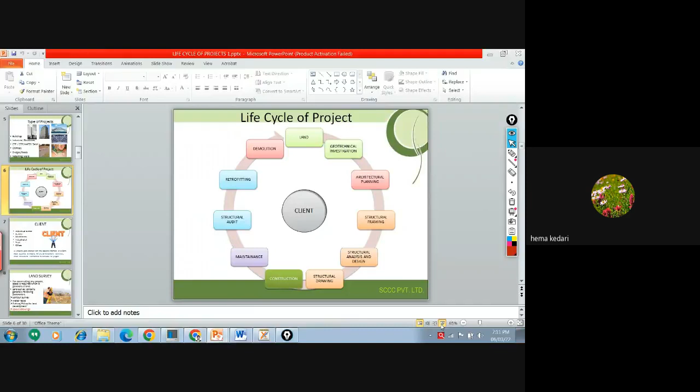Last time we started from this: client, then land survey, geotechnical survey, and architectural planning. I think all these 3 points are covered. Once the geotechnical investigation and architectural planning is done, we should go for the structural part, which is the major structural part. Whatever projects we generally get in any field, building, water tanks, or steel structures, they are within this framework, and our training program is also based on this framework.

So this is the zone where we are going to learn a lot of things. Almost 80 to 90% knowledge in our training program will lie within this frame, and all other basics will definitely be covered regarding construction, architecture and all, but mostly we are working here. So we need a lot of knowledge within this framework, it may be basic concepts, practical application, or software knowledge, all within this. This is what we can generally call the structural department.

Any consultancy firm, whether local or multinational, has a structural department within their organization, and that structural department works within this framework and coordinates with others. This structural team coordinates with architects, geotech people, clients, contractors, and the survey part. They also interact with the MEP agency, and they need to coordinate with all these people.

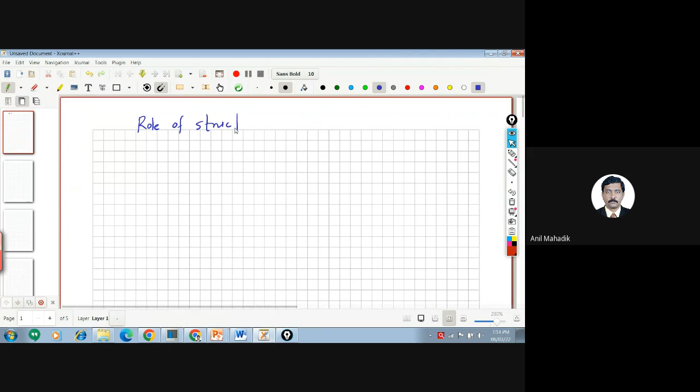Okay, so can anybody tell me what is the role of a structural engineer? Role and maybe responsibility also. Anybody? What is the role of structural - what is a structural engineer doing?

To check the stability of the structure under the given loading. Okay, so it's checking the stability. Okay, then what else is he doing?

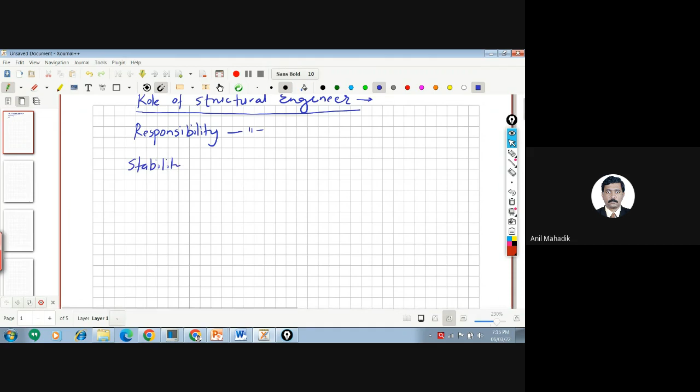Analysis and design the members, yes, building members. So he's doing the analysis of the structure, either building or tanks or steel structure or any other structure. He's also designing the structure - design of structure.

And what else is he doing? He's doing the drawings also, no? Structural drawings, preparation of structural drawings. Okay, what else? Preparation of detailing - the drawings and detailing, let's say in detail.

He's also doing BOQ, actually quantity estimation for RCC elements, the RCC part. Because the structural department is responsible for structural quantities - RCC part means quantity of reinforcement, quantity of concrete, shuttering, excavation, like that. So the basic part of the structure we can say. Generally the finishing part like painting, doors and windows - that BOQ is prepared by the architects mostly in general, or there may be a separate civil engineering team for preparation of BOQ. But structural engineer is giving RCC part BOQ also. So this is in general the role of structural engineer, and definitely coordination with all vendors.

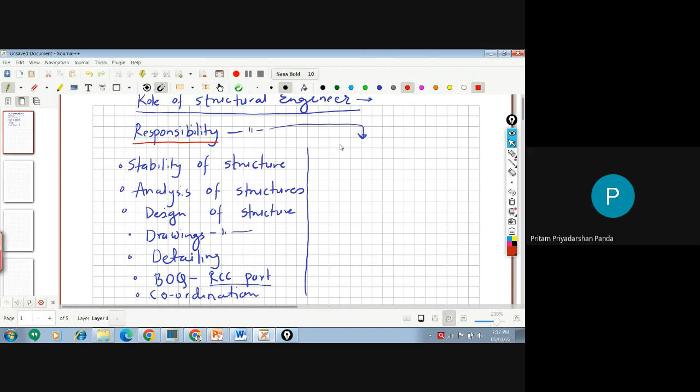And what is the responsibility? What responsibility does he carry out? The site engineer can consult, get ideas if he's having some doubts regarding the execution. Yes, this comes in the coordination. They need to coordinate within the team - it may be vendors, site engineers, architects, or whatever. You need to coordinate with them.

And what is the final responsibility of a structural engineer? The structure should be safe and stable. So he is responsible for the safety and stability of the structure, we can say. Because finally he needs to give the stability certificate - he has to sign that certificate.

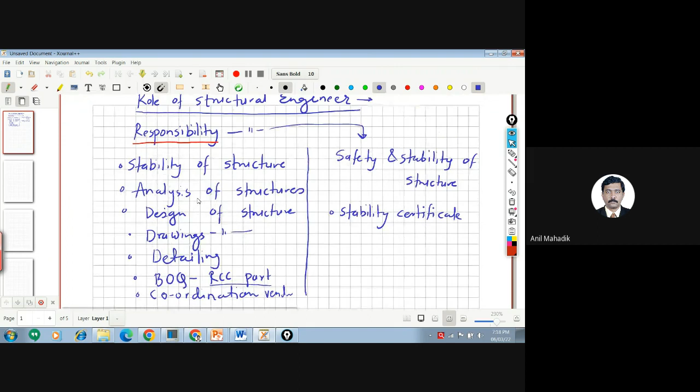So in general, these are the roles and responsibilities of a structural engineer. Now we will see each and every term in detail - within that responsibility, what parameters he is considering in the design and analysis. So whenever he is doing the design, analysis, and drawings, what parameters is he taking care of? Anybody know this - parameters considered while designing?

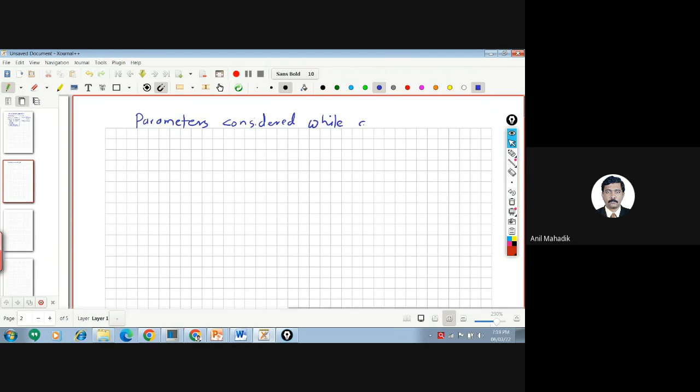Considering dead load and live load on the structure. Okay, we'll go in detail on that - in totality I'm just asking. For example, as we have already discussed, he's considering the stability of the structure first - that's one parameter. What is the second parameter? Strength - strength of the structure or members, we can say strength of members. Stability of structure.

What else? Safety. Yeah, safety - but whenever you consider all these parameters together, it is safety, we can say. I'm trying to use a technical term here because every technical word has a meaning. So safety means if you take care of the stability and strength, then you can say your structure is safe. Safety is one word, but let's put it separately for the time being. Okay, next.

Durability - yes, durability is one point. Then one more - serviceability. I think you know this word, we have learned it in IS 456. Serviceability, durability - what else?

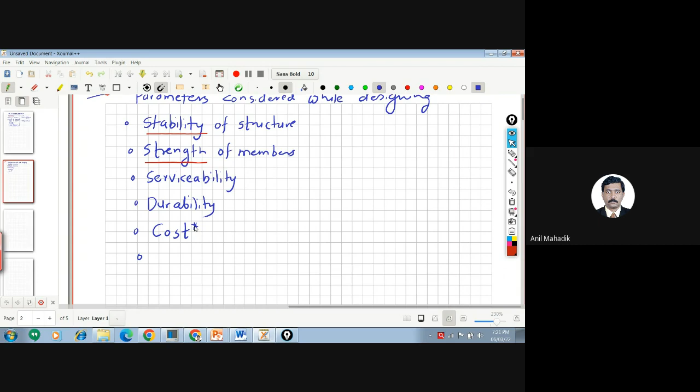What else? Any point you feel is required in designing?

Hello. Hello, am I audible? Hello. Yes sir, okay, audible, yeah.

Then there is one more point related with the functional part, we can say synergy. We'll see in detail what we want to understand by this word. So in general, these are the parameters which you should consider while designing the structures. Whenever I say designing, we are saying structural design, because it is part of the structural department. So whenever we design any structure, we are taking care of the stability of the structure, strength of the member, serviceability, durability of the structure, cost of the structure, and synergy of the structure. We will try to understand each and every word in detail now.

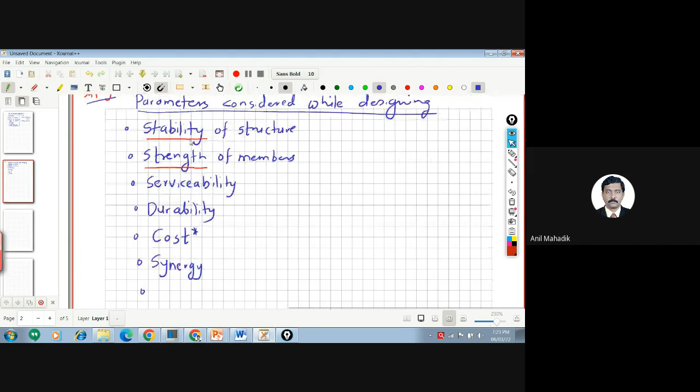As I told you, we are trying to understand the structural part of the life cycle, and it starts from the role, and then we are going in detail into this topic. I'll show you the structural department workflow also after that. First, we'll focus on these terms.

Okay, so what is meant by stability?

Do you know what stability means? The structure should be stable after considering all loads. Yeah, it should be stable.

Now see, there are terms like safety, there are words like stability, there is a word like strength. But in technical terms, we should understand what is meant exactly by stability, what is meant exactly by safety, or what is meant exactly by strength. Every word has a meaning technically. So for loading, the structure should be stable.

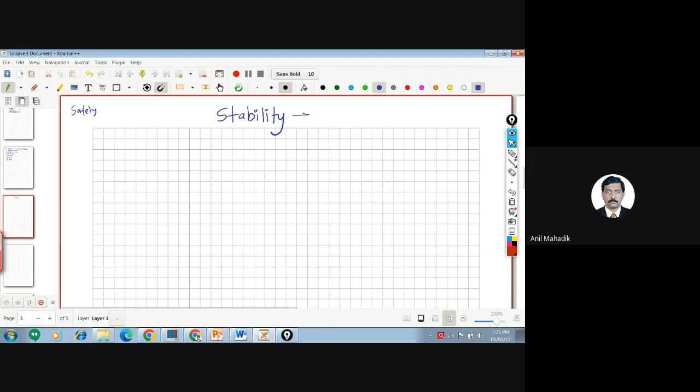Now let's see what is meant by stable. Stability means, in general, the structure should not collapse. This is a very important word. Once you know the purpose that I want to design the building such that the structure will not collapse, that is meant by stability.

Now you should know how you will make sure that the structure will not collapse. So for that we should know the examples. Can anybody tell me why structure fails actually, or collapses? What do you understand by structure will collapse? Collapse of structure, what does this mean?

Suppose the structure is collapsing, what is happening? Fall down, yes, fall down we can say. Directly collapse means fall down, let's say. Okay, say if there is a structure or building, and there are cracks in the beams or cracks in the columns, can you say that the structure is failing or collapsing? No, if there is a crack, we cannot say that it is collapsing.

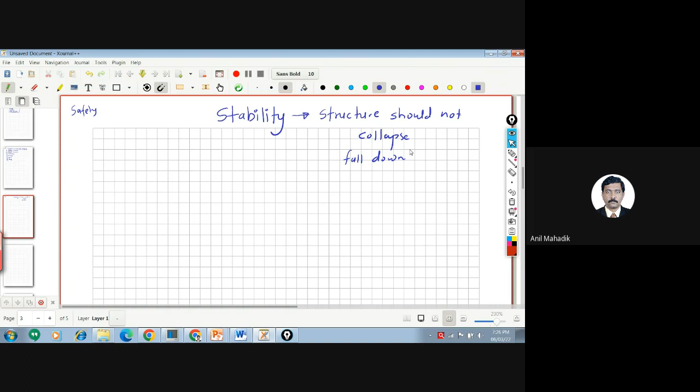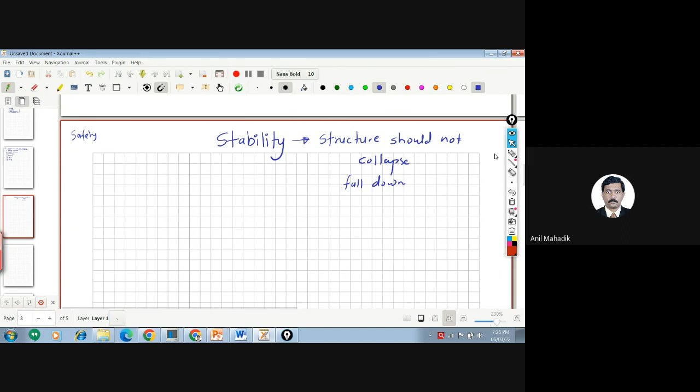It may not be safe, but we can't say it is collapsing, meaning directly falling down. That means you should know what may be the reason for falling down or collapse of the structure, and once you understand the reason, then you can take care of the stability part. So let's take a simple example. I'll ask you one question.

Simple question: there is one frame like this, and all joints of the frame are pin joints, okay, pinned or hinge. All joints are pin joints, and I am applying a horizontal load here. What will happen to this frame?

Sir, it will sway towards one side. Okay, it will sway. So I'm just asking you this question: will it sway like this? Is it so? Do you think so? Yes sir, yes sir.

You are partially right, but all joints are pin joints. This red color diagram, we can say, is a side sway, lateral sway, you can call it. But if all the 4 joints are pin joints, what will actually happen, that you should know, is that it will not sway, it will directly collapse like this.

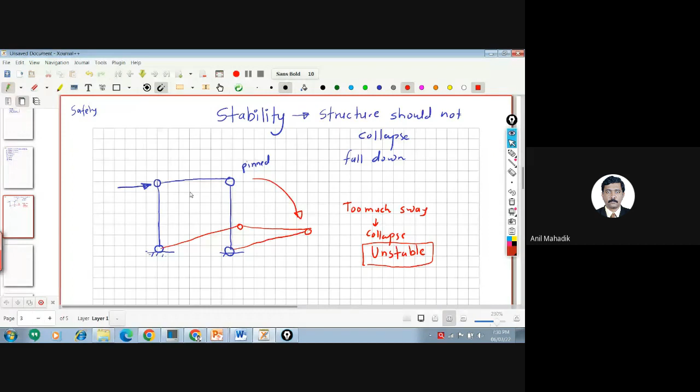Now, if I ask you, if you want to make this structure a stable structure, what would you do? Make the support fixed - okay, so this is one of the ways we can say. We can make the supports fixed.

We will learn what is meant by fixed support and how it is taken care of in practice. For the time being, let's just use the word fixed support. No worries. Now, if I apply the lateral load, what will happen to this?

Will it collapse like this? No, sir, no. Okay, but what will happen to this then?

Will it deflect? It will be a permissible deflection. Okay, so I'm just using simple and easy terms for now.

The deflection will be a little different, but just for this session, let's take it this way. So there will be deflection, I can call it delta deflection. So there will be deflection, but it will be within permissible limits, which we cannot call a collapse. There is a sway, so we can call this a lateral sway, but it is within limits, then it is okay, no worries.

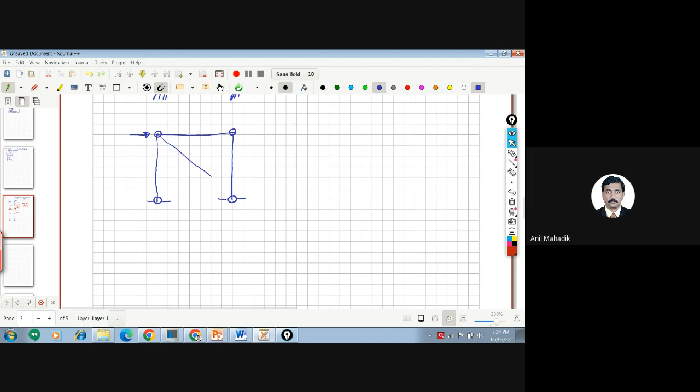Okay, so will it be stable now? Yes. Will it be stable, this structure?

See, this bracing will now help to resist the lateral deflection. So which force will come in this? Axial - axial force will be there, but if you push this, will it be tension or compression?

Tension? No, see, you are pushing this here, so this will be - compression. Compression, because this is trying to go here, so it will be compression. That means even though all joints are pin joints, if you only add this diagonal member, this will create compression in this member.

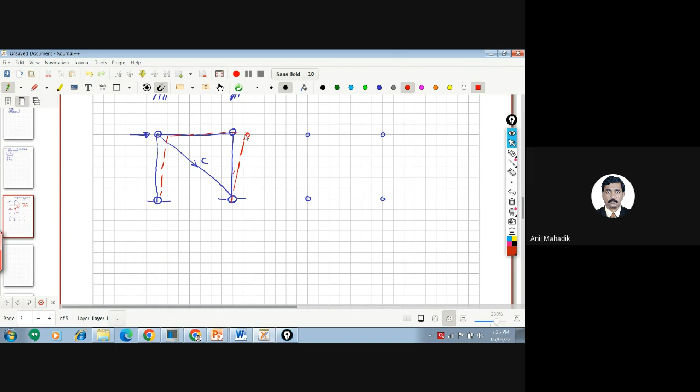And this compression will resist this horizontal deflection. So there will be horizontal deflection, but it may be within limits - it will not collapse, we can say. So this will be something due to this bracing, we can say. There is bracing, and there are different types of bracing. You can have all joints as pin joints, but you can have it like this also. So what force will come in this?

Which force will come in this? This is diagonal tension. How are you understanding whether tension or compression will come here? How are you figuring it out? Diagram transfer, load transfer. See, this is also diagonal, this is also diagonal. How are you understanding this? By looking at the arrow, what type of force is coming on the hinge. Then we can tell if there is compression or tension.

See, visually, see what happens whenever we learn anything. We can understand the concepts which we can see through our eyes or observation. See, after mathematical calculations, if you are getting the things, there may be mistakes also. So if you do plus minus in mathematical calculation, there may be a possibility that tension will become compression or compression will become tension.

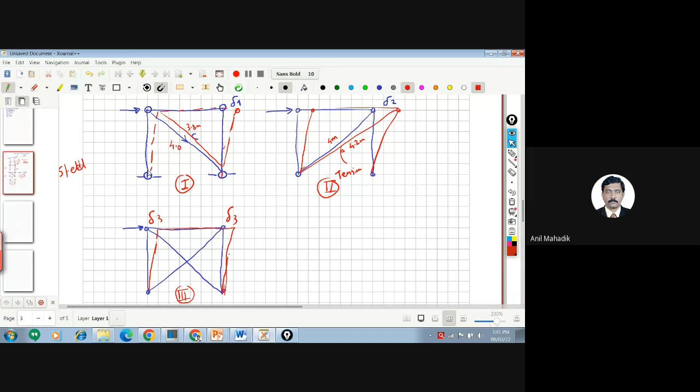Yeah, we are just talking here, huh? Steel. Which frame will give more deflection and which will give less deflection? So the third one will give least deflection, and the second one will give highest deflection among the three. No, see, these members are steel structure members, all members. So will this give more deflection than this, or will the first one give more? Think.

See, I think conceptually you know that steel structure, let's say there is a steel structure here, and if you apply the load, there is a compression. And do you know that when the member length is more, generally steel member buckles? So as it is a compression member, it will try to buckle, isn't it? Yes or no, compression steel member tries to buckle. Yeah actually. So whenever it has a buckling tendency in steel structure, definitely this will have less capacity, so it may deflect more, so it will be more deflection. And as this member is steel member and it is in pure tension, it has pure tension capacity, full capacity, so it will deflect less actually. So this will be the middle deflection.

Delta 2 is middle, delta 1 is very high deflection, and delta 3 is very less. So I can say that the lateral stiffness of this frame is more, and it is very less over here.

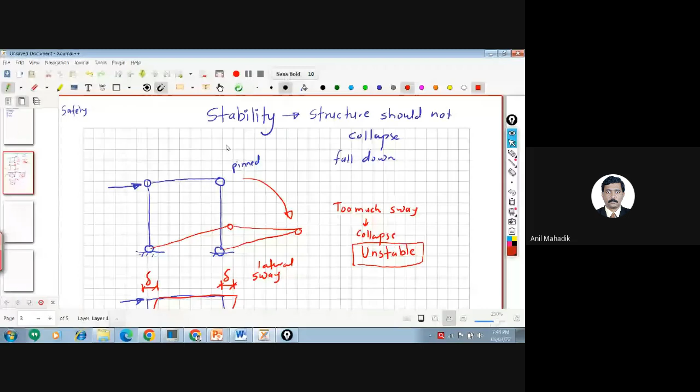So in stability, mainly we are concerned about the joint or supporting conditions. Joint or support conditions are very much important in stability.

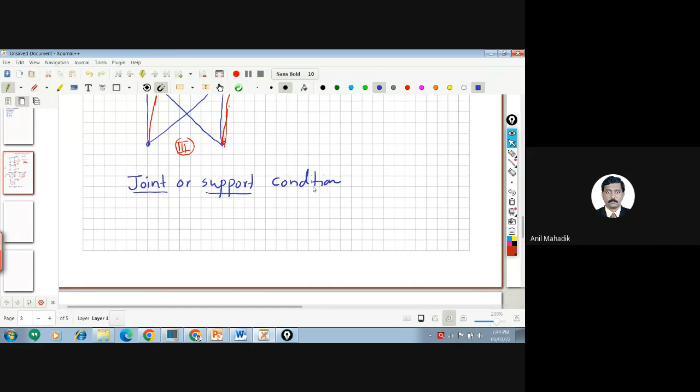You should make sure that your structure is safe by giving appropriate joint or supporting conditions. In technical terms, what word do we use for this joint or supporting condition? The technical word is boundary conditions.

If you want to make the structure stable, make sure that your boundary conditions, joint or support conditions, are having relevant supports. Either it should be fixed - fixed is always good, it gives more stiffness to the structure since all joints are fixed. And if you want to make a steel structure with hinge or pin joints, then provide bracings within that - either X bracing, A type bracing, or single tension or compression bracing. So you can use this for making structure stable.

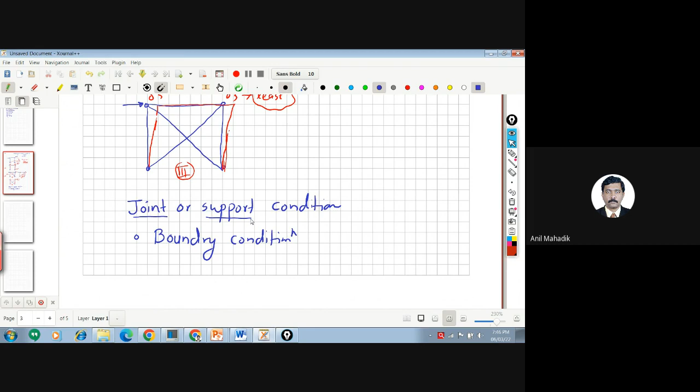Now these are the conceptual parts we are learning. After that, you should know how to apply this on real projects also - what care is taken in real structures. I want to ask you one more question.

Now let's say this frame - you said all joints should be fixed. I again ask you one question. Let's say this is your pin support, and these two supports are fixed supports. Is it a stable structure?

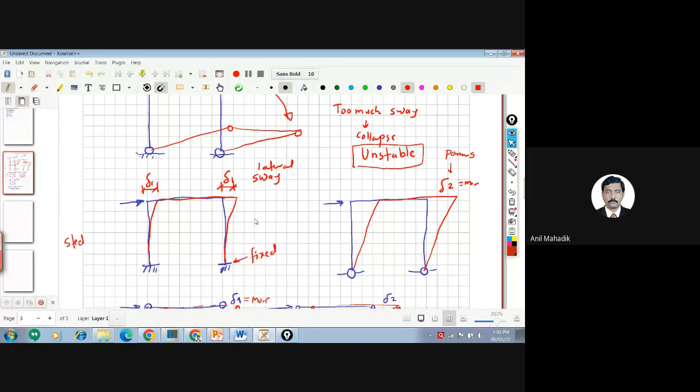So this is, in general, the stability of a structure, and a simple example. There is one more example, an instability structure - let's say a cantilever, there is one cantilever, and then there is one.

This is a cantilever, let's say, which is connected to this wall through this pin - okay, one bolt, we can say. Is it stable or unstable?

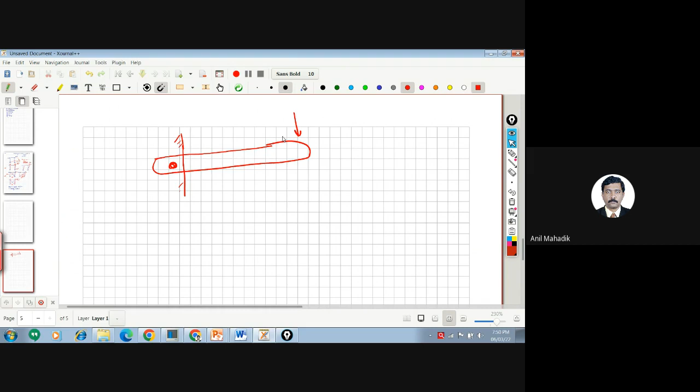Now it will rotate, yeah, it will rotate like this. Something will definitely fall, almost. It will rotate, too much rotation. Is it stable?

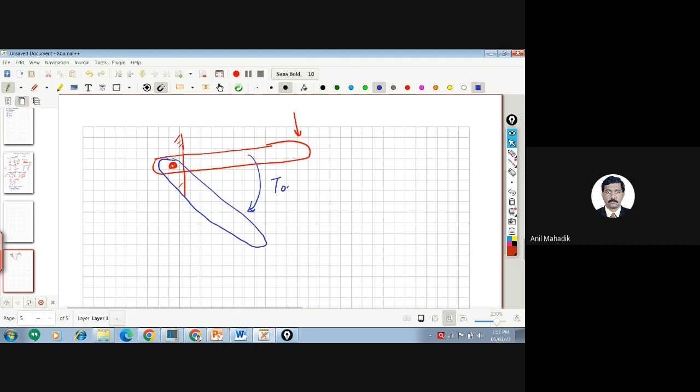Yes. Stable or unstable? Unstable. So it is an unstable structure.

Now you can understand that mostly the stability is related with the joint or support conditions. There may be certain additional things, but in general, in structural engineering, the stability is something related with the joint conditions, supporting conditions, or boundary conditions. So before creating any model in structures, make sure your joints are such that it makes the stability. Okay, so this was the word stability, first type word.

Now I will take, before strength, I'll just go to serviceability first. So what do you understand by serviceability?

Serviceability का मतलब क्या है? So if the structure is providing the functionality properly or not.

Functionality means what are the functionality points? Technically, what are those points?

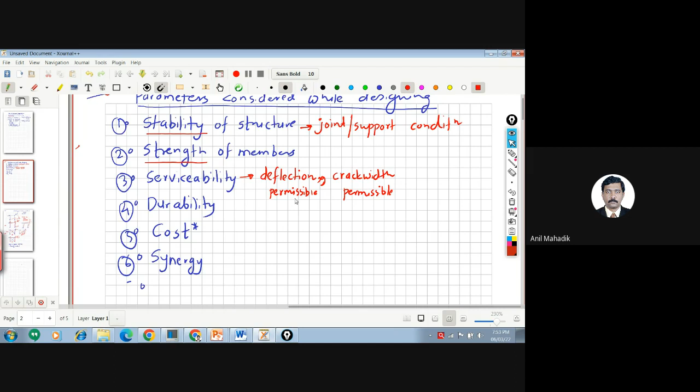Now tell me, we'll take the example of the same structures here. Let's say this is your case - ये case है समझो। A structure, and now let there be a force, 10 kilonewton या कुछ तो force है समझो। So it is going to deflect, so there will be delta, deflection.

So let's say this deflection is 10 mm, let's say. Now, how will you understand whether this deflection is permissible or not? Where will you get the information regarding the permissible deflections? So 10 mm okay है या नहीं है? How will you understand this?

From codes. Yes, from codes. So the code gives the information regarding the permissible deflections - either lateral deflections or vertical deflection also. So due to dead load, live load, there is a deflection, and there you will get it.

So how do you calculate the deflection? We have learned in engineering the calculation of deflection of members. अभी इसका deflection निकालना होगा तो कैसे निकालेंगे आप?

So manually for frame deflections, you can get it through the books actually. The methods are given, but nowadays, as you can use your softwares, you can directly model this frame and just put the loads and you will get the deflections.

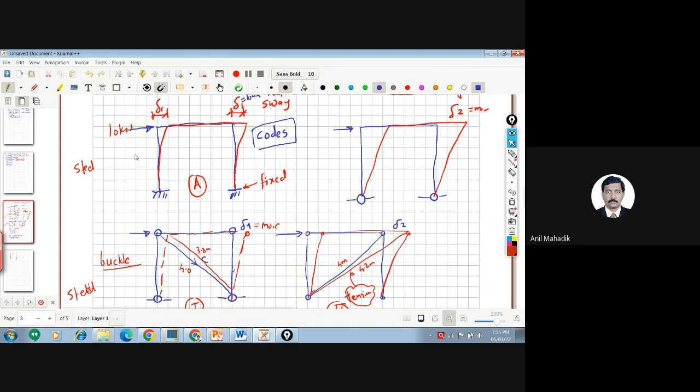If you want to calculate the deflection of simple members - see, as the structure becomes complex, it is very difficult to calculate the deflection manually. If I ask you to calculate the deflection for, let's say, a simply supported beam, can you calculate this?

Let's say there is a simply supported beam and there is a vertical load W, okay, and this is EI. Can you calculate the deflection? Vertical deflection like this - yeah, ऐसे कुछ तो deflect होगा ना vertically. So there is a delta like this.

So if the structure is simple, like determinate structures, then we already have the formula available in books or ready reckoners. Like this, I'm just giving an example - WL raised to 4 upon EI. So these are the examples.

So for different loading conditions, for different boundary conditions - if it is a pinned support, this is the deflection formula. If it is a fixed support, the formula is different. If it is lateral load on the frame, there are formulas given. So you need not remember everything - you can have your ready reckoners and books along with you. We will share with you this deflection formula and all.

You should know you can either get it through these formulae given in the books, or you can model this structure in softwares like STAAD or ETABS and get the deflection from the software itself.

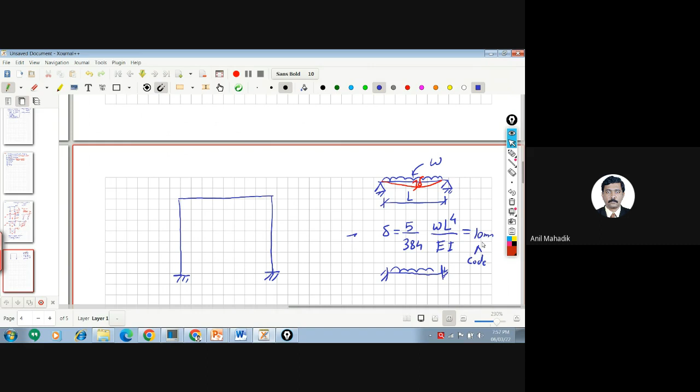Now, second question I want to ask you: the deflection may be either vertical or horizontal. Now, why should the deflection be within the limits?

Let's say there is a load, this is a bedroom, and there is a load like this, and the beam deflects like this. And this deflection, let's say it is 200 mm. This is a bedroom. Is it okay to have this deflection?

As a structural engineer, I have designed this frame and put more steel in it. The grade of concrete is also very high. Only the deflection is more, which is 200 mm. Will you really be happy to stay in this kind of room where the beam deflection is 200 mm? No, sir. So what is the reason for that?

Safety. First of all, there is a psychological tendency, and aesthetically also it is not good, we can see there is a lot of deflection. Yes, psychological condition, you are right. And aesthetic is also a factor. The functional part is that there may be problems to the plaster or objects connected to it, they may fall or have deflections. So psychological fear is there.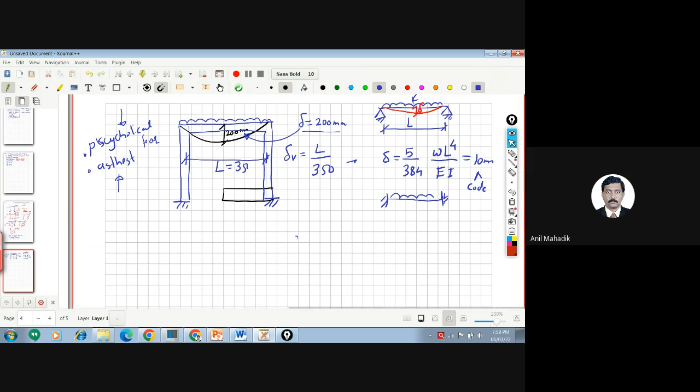3.5 meters, okay, 3500 mm. So what is my permissible deflection? 3500 mm divided by 350 means how much? 10 mm. So for this span, generally 10 mm is accepted as per the code.

So if your calculations are giving a deflection of, let's say, 20 mm, is it okay? Does it satisfy the code? No, sir, because the code says maximum 10 mm is required, but here it is 20 mm, so that is not okay. Let's say your calculation is giving 5 mm deflection, is it okay?

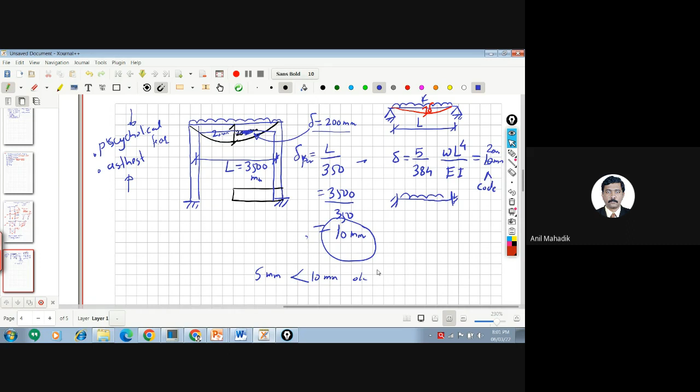Yes, sir. Okay, so this way we generally check, and what we are doing here is nothing but a serviceability check, which is related to the deflection part. And for that you should know the codes, and you should know how to calculate the deflection of the members.

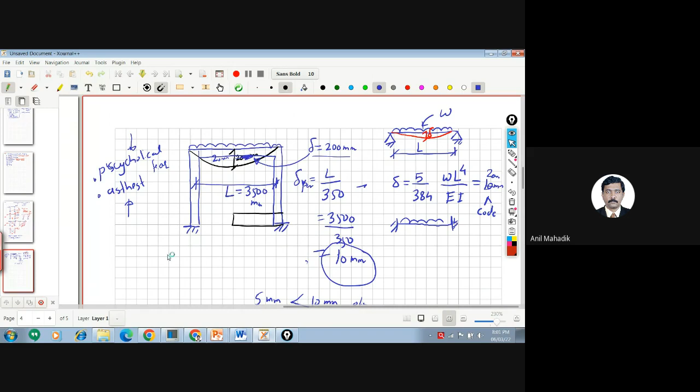So we have seen serviceability, and one more thing is there: crack width calculations. So when there is a beam, let's say this is our beam, do you know what is the permissible crack width as per the code? Do you know how much it is? Permissible crack width... 0.75D.

No, it's simple. In limit state design, as in buildings, we can say 0.3 mm is the permissible crack width. So whatever our IS code is prepared is depending on this 0.3 mm permissible crack width. So we don't exceed this.

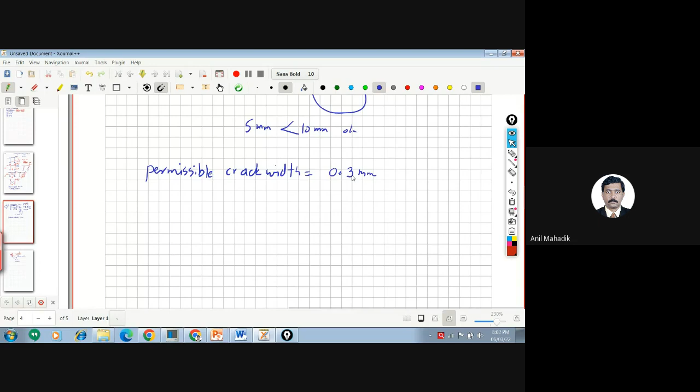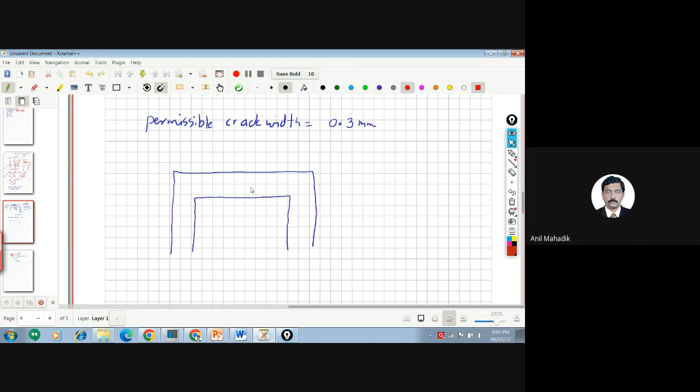Now can anybody tell me why the crack width limit is needed? What happens if the crack width is more? There will be a chance of corrosion to the reinforcement. Yes, there is a chance of corrosion. So let's say there is a load from above, there is a load here, and due to the load, the beam will bend.

And due to the bending, there is a possibility of cracks developing here. So the cracks are developed due to the bending stresses. Generally, cracks are developed due to the stresses, and stresses are developed due to the load. So loads are causing stresses, stresses are causing cracks. Load, stress, and then cracks.

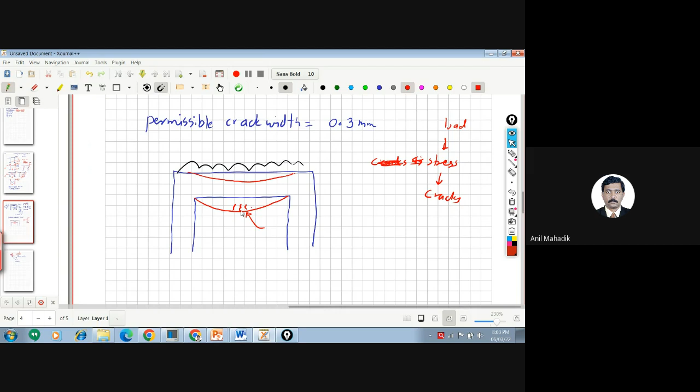So as you said, it is psychological also. There will be fear that if a structure is showing cracks, that means there is a likelihood of failure of structure. So you will also have fear in your mind whether this structure will fail or not. So there is one more point, psychological, and definitely a functional part too. Due to the cracks, there is a possibility of corrosion of the reinforcement due to environmental attack, and that's why crack width is also important, and this is also a serviceability criteria.

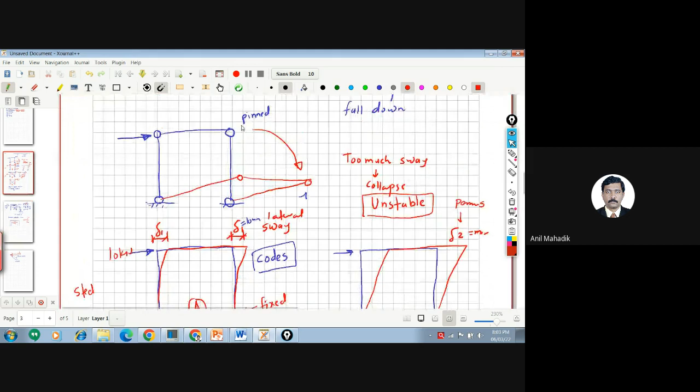So these are the two important serviceability criteria: deflection and crack width. So we have seen stability, we have seen serviceability. That means if the structure is giving permissible deflection, we can say it is okay. But if the structure is giving too much deflection, too much sway, we can say it is unstable. So it depends on the calculations of deflection, whether it is stable, unstable, or serviceable.

Then the second point is strength of the structure. What does strength mean? Ability to sustain the load. Yes, ability to sustain the load. Now how will you prove this in technical language? How are we taking care of the strength?

So generally the strength of the members, the more appropriate word would be strength of material. Strength of material, okay, that is the right word. So whatever material you are using in the structure, either concrete, steel, or timber or any other material, the strength of that material should be such that it will not crack, isn't it?

So can you give me an example of how we are taking care of this? See, here in serviceability, we calculated actual deflection through our manual methods, book methods, or software methods. I have calculated actual deflection and checked it with the permissible deflection given in the code. So actual deflection should be less than permissible deflection given in the code. This criteria satisfies my serviceability issues. So this is my technical way: calculate actual deflection mathematically or through software, then compare with the code.

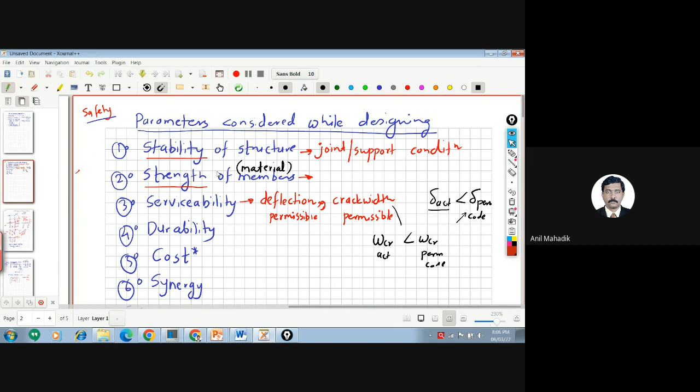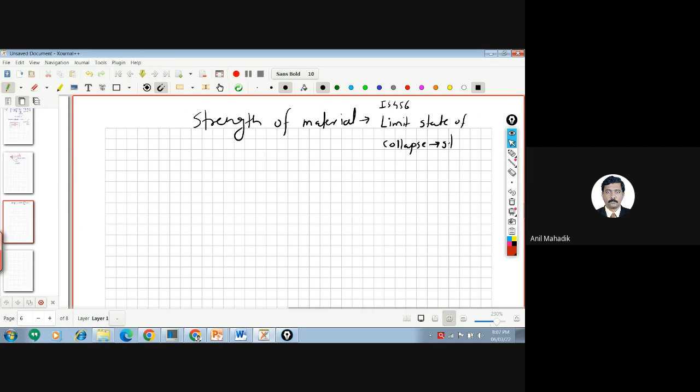So strength of material is something related with... In IS 456, all of you know we have learned limit state of collapse, which is nothing but the strength criteria. So in IS 456, there is one term limit state of collapse, and a second term limit state of serviceability, which we have already seen. Now what is limit state of collapse, which is nothing but strength of material? So what comes in your mind whenever you say strength of material or strength criteria? Material tension properties, compression, torsion, and flexure. So I would say in simple terms, stresses.

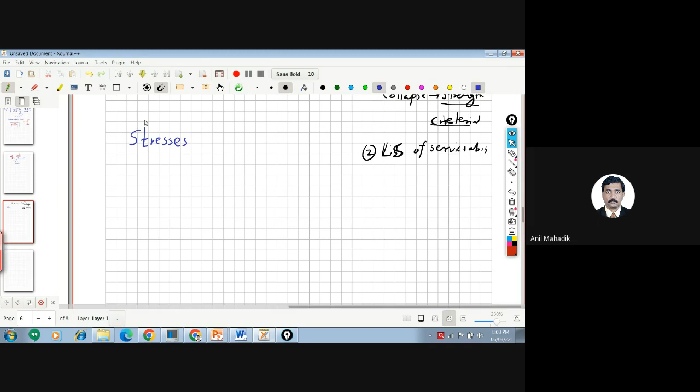Whatever stresses come in the materials, that is actual stresses. Why is there stress in any material? Due to the load. So loads are creating stresses within the material. So you need to actually calculate the stresses in any material, and the actual stresses should be less than the permissible stresses given in the code. So this is a simple term, we can say. You should calculate the actual stresses within the material and check with the permissible stresses given in the code. Now you should know why stresses come in the structure or members, and what types of stresses are there, and calculate them as per mathematical calculations and compare with the codes.

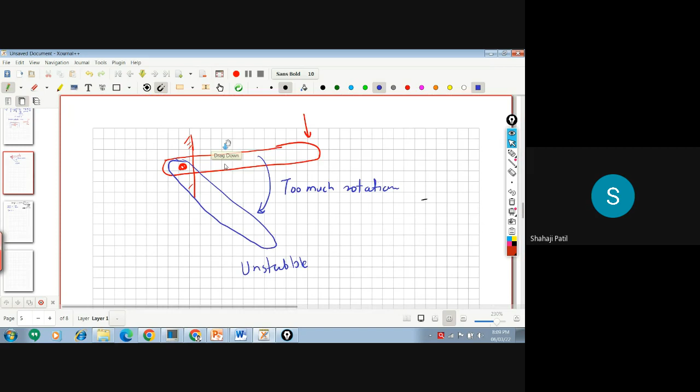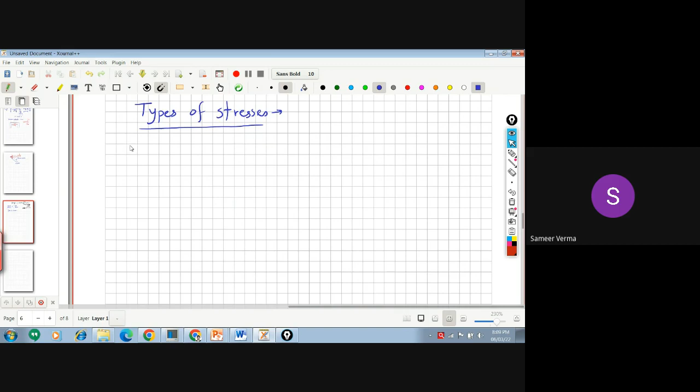So can you tell me what are the types of stresses? Give an example of stresses. Do you know? Compression stress, shear stress, tensile stress, bending stress - bending is correct.

Let's say, for example, you are putting force like this. Suppose this is a column, and load is coming from above. So what stress will come in this member? Compression stress. So generally stress is denoted by sigma. As it is actually an axial member, I can say sigma axial. Is it compression or tension here? Compression stress. So this is nothing but compressive stress. This is a technical term generally used in codes. So compressive stress, this is one kind of stress.

Now understand another stress. Let's say there is a steel rod like this, and I am pulling it - applying some load here, and this is my steel rod. So what stress will come in this? Tensile stress. Sigma AT also, because it is also an axial member, I can say tensile stress.

So these are the axial stresses, we can say, either compressive or tensile stress. There are some other stresses, like shear stress. Let me take an example of a beam, a simple beam.

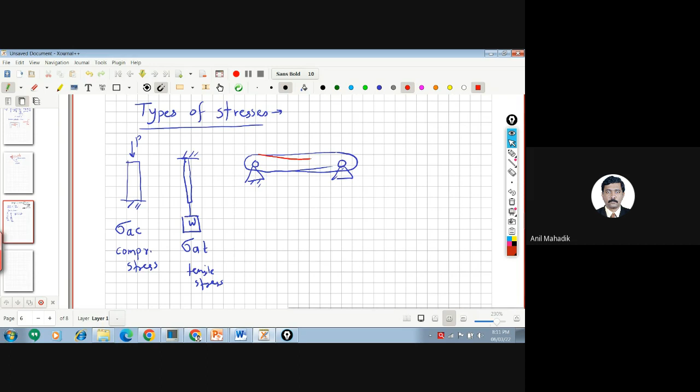Suppose this is my beam, a simply supported beam. This will bend, yes or no? It will bend like this.

And due to the bending, which stresses will come? There will be bending stress, sigma B. But whenever a beam bends, what happens to the top line? Compression stress. So in a simply supported structure, compression comes at the top. Let me denote it like this. So it is compression at the top, and at the bottom what will it be? Tensile stress.

That means there are two stresses. Bending stress sigma B compressive means bending compression stress, so I would say this is bending stress in compression. And at the top generally it remains this, and at the bottom what will it be, sigma BT, bending stress in tension. So there may be bending stresses also like this, axial stresses tensile or compressive, or bending stresses tensile or compressive.

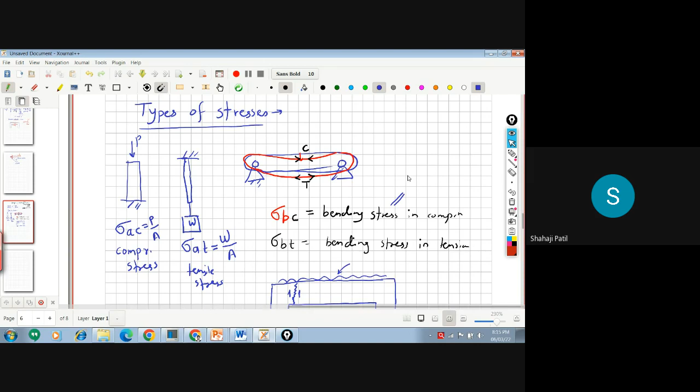P upon A. Sorry, how will bending stress be found? Stress is M upon Z, yes sir. So due to this bending, there will be bending moment, bending moment upon section modulus Z, that is bending stress. If this Z is for compression take ZC, and sigma B equals M upon ZT means for tension. And how to calculate shear stress?

Load divided by area, but the load is shear force, right? This is nothing but shear force. So how to calculate shear force? What is meant by shear force? We will learn that in basic sessions. So area, shear force divided by area. These are the actual calculations.

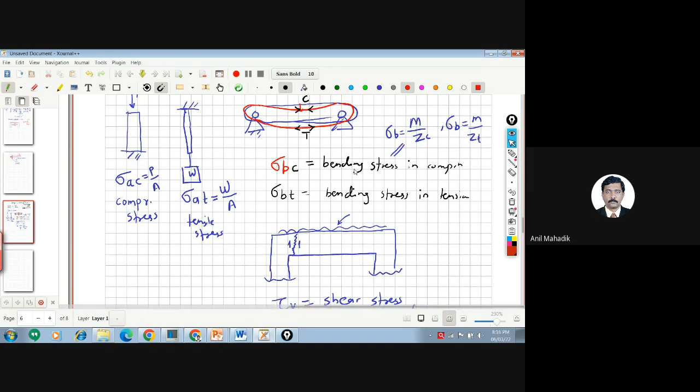Once you calculate the stresses, what do you have to do? Compare with permissible stress. It is all given in the code. So each and every code has given these stresses. Check whether it is less than sigma AC permissible as per code. So all stresses you should compare with the code stresses. So have you understood what is meant by strength criteria?

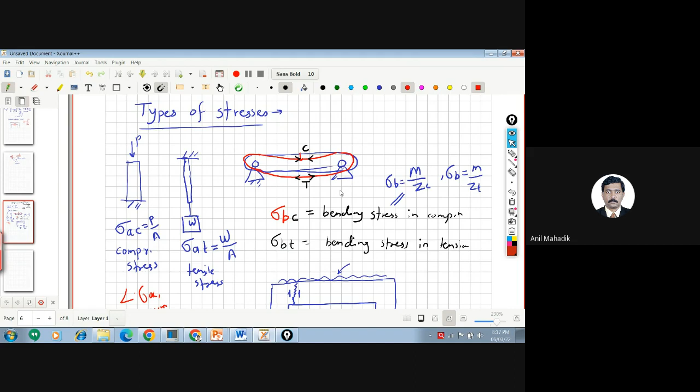Yes sir. So in IS 456, it is giving values for concrete and reinforcement. In IS 800, it is giving for steel structures only, purely steel structures. And these are the two materials we are mainly using in structures. Then for timbers, there are different codes, I don't remember the numbers. If you want to check the stresses regarding timber structures, you can refer to their codes for timber. They are available in Indian codes and other international countries also.

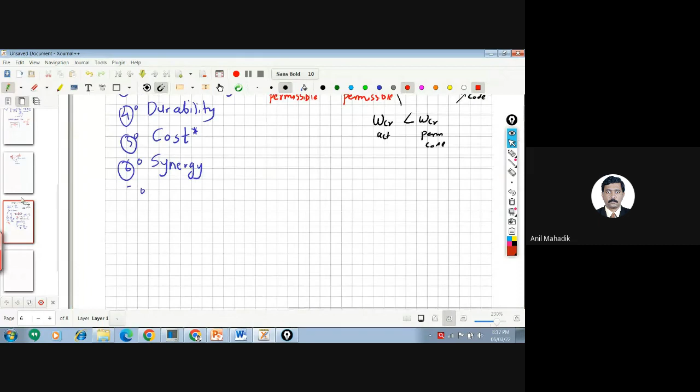So I would summarize this as, today's session is very important. You should use these basics whenever you design any other structures, bigger structures. Now I would say strength of member is nothing but...

actual stresses, whatever may be the type of stress, should be less than permissible stress given in the code. For different materials, the codes are different. So this is the strength of members.

These are three important things we take care of. We are more concerned about these parameters: serviceability, strength, and stability in structural engineering. Then durability, cost, and synergy are important, but we are not doing much in this part. We are doing much in this area. This part A is very much important, 1, 2, 3.

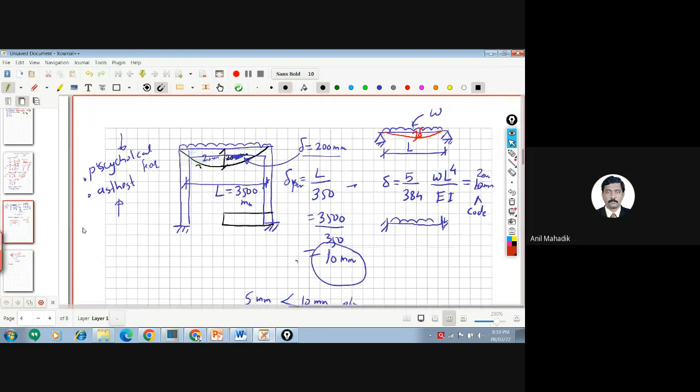Use richer mix, use design mix. So in durability, proper clear cover can be provided to increase the durability. One important point is clear cover should be sufficient.

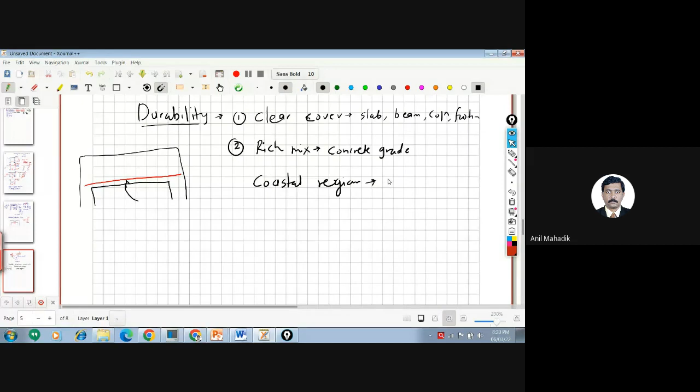This is also a good parameter. It is better to have, for example, in coastal regions near the sea, the grade of concrete should be higher than in dry zones. So as per our code, minimum grade of concrete is M20 for dry zones or dry cities, and M25 grade is for coastal regions like Mumbai or other coastal regions in India. M30 grade is also used as minimum grade for water tanks, because it is continuously in contact with water.

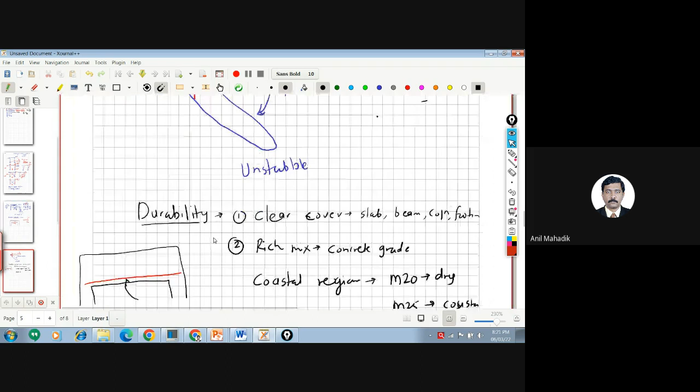So these are the durability criteria. Due to that, the structural life will increase. So these are the two parameters we can say.

There is one more parameter which is not structural but functional level. We do the plastering of the members, then we give painting to the members, epoxy paint or general paint. In steel members, we give the epoxy painting. First we give the red oxide, then epoxy paint, like that. So these are the things generally used to increase the life of the structure, which is durability criteria.

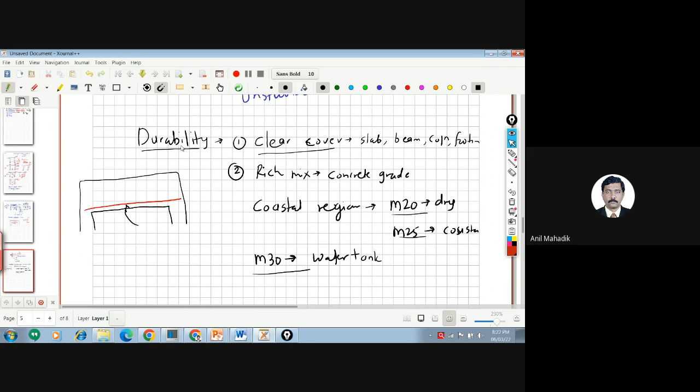Technically, in codes it is given: clear cover, grade of concrete, these criteria are given. And non-structural criteria may be painting of the structure, plastering of the structure, like that. So this is nothing but durability.

And what else is there? Cost. So what is this parameter, cost?

Yes, economical point of view. So whatever system you are proposing as a structural design, it should give less cost. So what generally happens?

See, there are many solutions to a single problem, as I told you. Now if we have to design a building, let's say a high-rise building, then you can have a lot of options. Let's say there are 4 to 5 structural engineers given the same design problem for a high-rise building, with the same architectural plan, and 5 consultants given the structural design task. Do you think all the structural designs will be the same?

No, sir. Do you think the structural designs given by all the engineers are unsafe? No. That means they give a safe design. There is no problem because they will follow the codes, use the software, check it, whatever is needed. So they are taking care. But why then are the designs different?

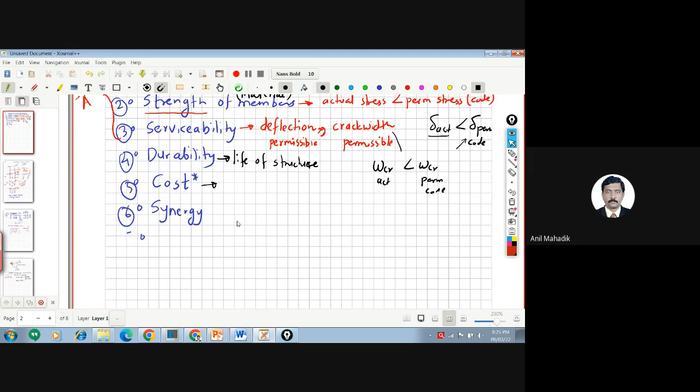But whatever may be the creativity, if you compare the cost - suppose there's a first structural engineer, second, third, fourth structural engineer. If the first one gives a price of 1 crore, second gives 1.2 crores, third gives 2 crores, and fourth gives 3 crores, so who will the client choose, which one?

First one, lower side. Yes, generally the client is always happy with the low cost of the project because he gets more profit.

It's all for profit, meaning this is a business actually. As we are part of the business, as we are stakeholders of the client's business - we can call them projects - we should take care of the cost. If you save the cost, you can get a part of it, whatever safety margin is there in your fees, and you will get more jobs. So you should always make sure that your structure is cost effective.

And for that, generally what is done - you can have 2-3 options. So as I said there are 4 structural engineers, but I will say the structural engineer is only one. Let's say we are the structural engineer, but we are giving 3 to 4 solutions. We make 4 models or 3 models, and I check the safety first. Once I check the safety, I calculate the cost of the project, and whichever gives less cost, I will choose.

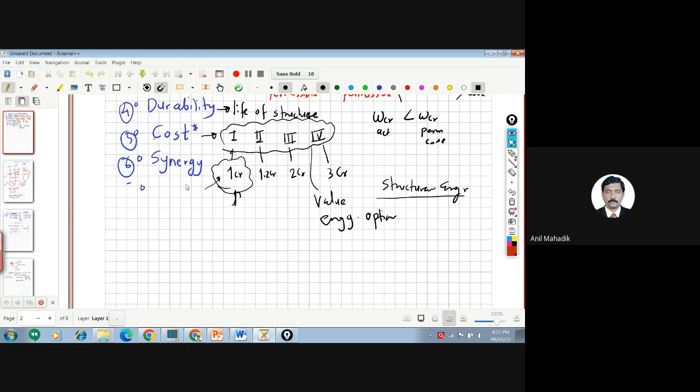So this is one case - generally we prepare different models in this. Synergy part, do you know this? What is synergy? We discussed this last time I think. Synergy, do you know? Do you know this term? So in general meaning of this, not word to word meaning, but synergy - what are we doing.

Last time I took the example of a marriage hall, yes or no? So for a marriage hall, we have the functional point of view - so the functional part we take care of. What happens many times is whenever you work, the architects ask you certain things, and as a structural engineer you may say I don't want to give that. So you may say, let's say this is a 10 meter by 10 meter marriage hall.

As a structural engineer, generally what happens, the structural engineer is always happy with lesser spans. He is not interested in giving more span, because if the span of the beam is more, then it will give more deflection. So there may be serviceability issues, or the beam depth needs to be more. The cost may also go high. Whenever you do bigger span structures like this, 10 meter by 10 meter, there is a possibility that cost will increase, deflection will increase, and you need to give more depth to the beams. So you will definitely try to avoid this.

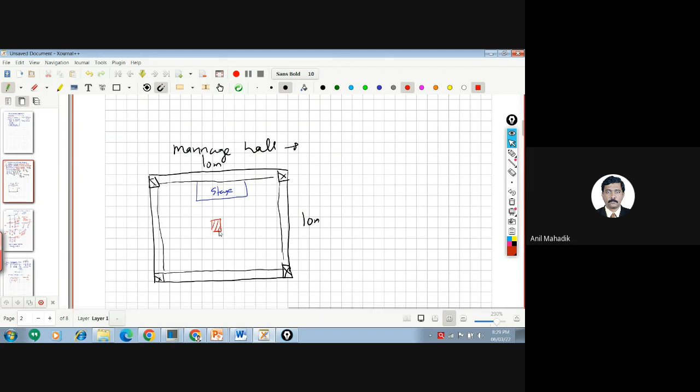As a structural engineer, I say, can I give a column here? Let's say this is our marriage hall, and here is the stage. This is the plan, and I am asking the architect, please allow me this column so that I will have small span beams. I can have these beams, and these columns like this. So what will be my span of the beam here? Beam and slab span kitna rahega? 5 meters, 5 meters.

So definitely as a structural engineering solution, it is always better to have a lesser span of beams and more columns, because the structure becomes more stiff, stable, and there are fewer serviceability issues. Because as the span increases, serviceability issues may increase, and cost may also become a problem sometimes.

As a structural engineer, I know this is really a good solution from the structural point of view, but is it really a good solution from the functional point of view? No. It will be bad, because even though your structure is very safe and cost effective, it still doesn't fulfill the functional requirement. That means every structure has its own requirements. I understand that you, as an engineer, are more focused on safety, but still it is not really a good structure. So the engineer who takes care of the synergy part of the structure is taking care of the functional part of that structure, or the architect's requirement, such that it is fully satisfied.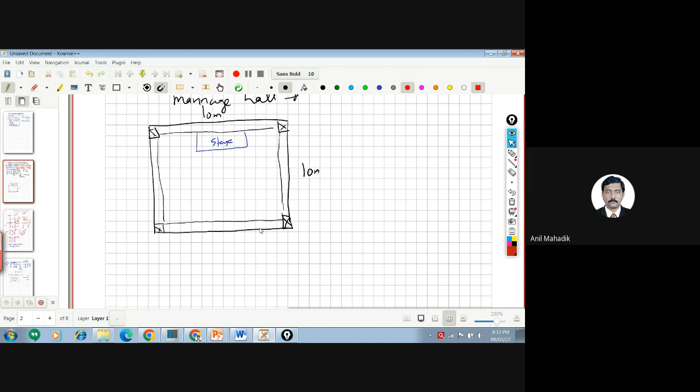So if there are challenges like this, you need to handle them, otherwise the stadium will not fulfill its functional requirements. So these are the cases, and whatever you are doing for this is something related to the synergy part, we can say. Okay, synergy ka matlab samajh mein aayega in general.

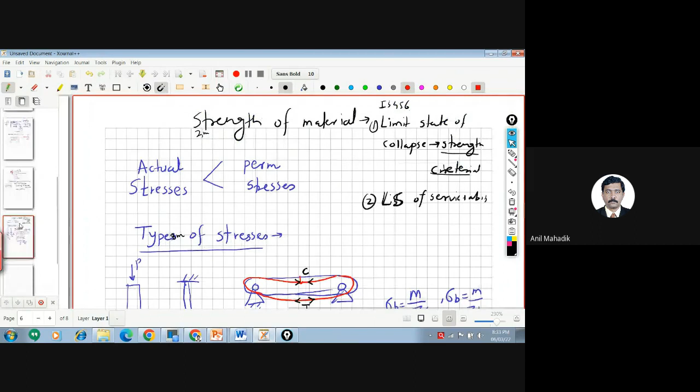And these are the parameters we are considering in structural design. All of you got this? Yes sir. So please take note of all this. You can refer to the video or whatever. See, these are the only 6 parameters you should consider in your design. Don't forget any of these. Without this, your design will not fulfill the structure's requirements.

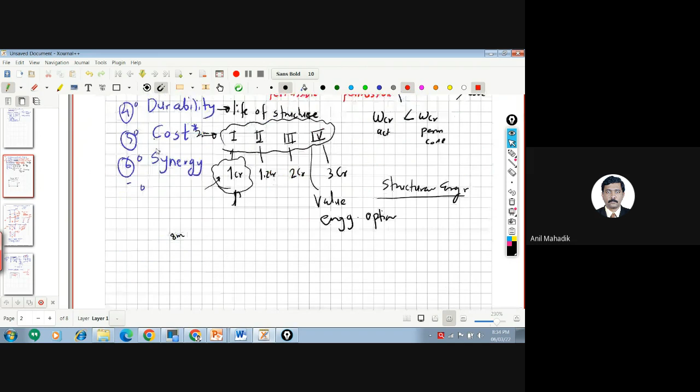Stability is highly important, so these are the steps. You should first take care of stability. Once you make the structure stable, then you can design and analyze the structure. Analysis is done to calculate the stresses. Once you calculate the stresses, you take care of the strength criteria, then calculate deflections for the serviceability criteria, then provide sufficient cover for durability criteria, calculate the cost of the project to check the optimum cost, and in coordination with the architects, make sure the architects' requirements are satisfied in a better way.

See, it is not always possible to satisfy all the requirements of architects. There is a possibility that the architect is asking for something non-technical which may cause a problem to the structure in future. In that case, don't allow the architect's point - there you can hold your strong points. It is not necessary that you should agree 100% with the architect's points. Many times the architect asks for anything, but it may not be possible to follow that. So it is, we can say, a judgment call, which you will learn through experience and through coordination and communication with the team.

So these are the things. Now in our sessions ahead, we will learn all this in detail - how to calculate the stresses, what is given in the code, and so on. So a lot of things are there to learn.

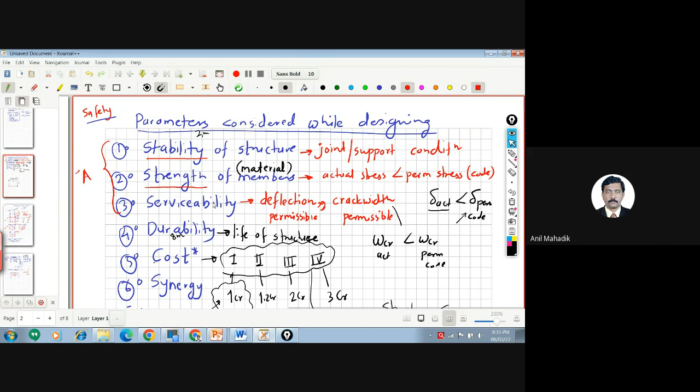Now, let's understand the structural department workflow - how we work, where it starts and where it generally ends.

So as I told you, we get the architectural drawings. It may be plan, elevation, sections like that. And there is a site layout also, building line, site layout. Then parking layout is also there in the buildings. And column positions, sometimes architect gives column positions and orientations also, and offset side also, number of floors like that. So we get that architectural drawings in the beginning.

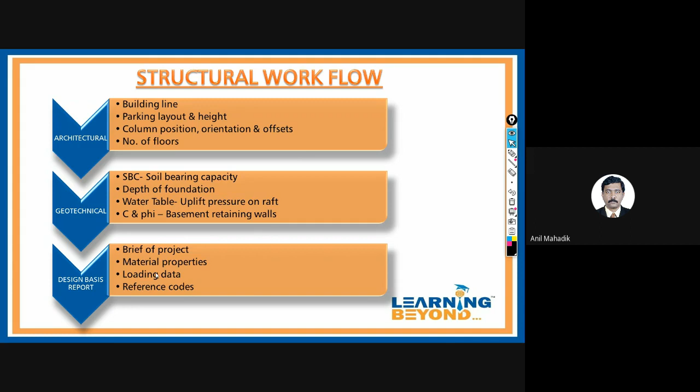And on the basis of this, we prepare the design basis reports. Anybody knows what is meant by design basis report? We are going to learn that, but I'll just brief you. We give the brief introduction of the project in the design basis reports. Then we give the material properties like what grade of steel, what grade of concrete you are using, what are the loads you are considering, dead load, live load, earthquake loads, like that. What reference codes you are using for the design, that we put here. So this is our basis for analysis, for design, for drawings, everything. This is the basis.

Once you do the design basis, then we prepare the structural general arrangement drawing. So what we do in structural general arrangement drawings, we put the column locations, columns on the plan. Let's say take an example of building first. Putting the columns on the plan, putting the beams on the plan, shear walls, and give the name to the beams like B1, B2, B3, or columns C1, C2, C3, like that. So we concept drawings. Structural GA is concept structural drawing. We decide the load path, one-way slab, two-way slab, like that. So we mark that on the plan. So this is the structural GA start.

Then second point, once you prepare the structural GA drawings, you approve them from the architects, and then you prepare the ETAB model. So ETAB model means we can say preparing that column, beam, slabs, modeling everything there, beam, slab, columns and footings, supports, then putting the concrete material, steel material, giving the sizes to the beams and columns, like that. So everything we do, we give the load in the ETAB model, we give the load combination as per the code. So this model, we call it as a mathematical model.

So once you put this, then we do the analysis. So once application of the loads are done, you can do the analysis. Analysis means what? What do you understand by analysis? So analysis means generally we apply the load on the structure.

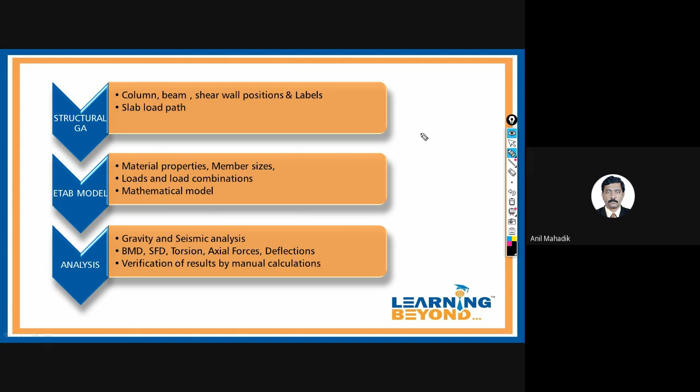So we first generate the frame. This you'll learn in the ETAB modeling sessions. But analysis means, in simple, I would say, first you create a structural arrangement. Let's say I want to construct a room, single room RCC structure. So what I will do, I will take what height of the building, height of the room I want. Let's say I want 3 meter height. What is the width of the room? Let's say 4 meter width. So what I will do, I will put the columns, then I will put the footings here below this.

And I will prepare this model. So this drawing is called as the mathematical model. Then I am putting the gravity load, self weight. Gravity load means dead weight, then live load on this room. So this creating this geometry. So mathematical model means geometry. I have created the geometry that as per the functional requirement, geometry and dimensions and everything.

After the geometry, what I am doing, I am putting the loads on the structure. And after the load, what will happen? Due to the load, what will happen to this? Stresses are developed. Yeah, so first point I would say it will deflect. Okay, so it will deflect. So due to the load, there will be deflection. And due to the deflection, there will be bending moments. There may be shear force. There may be axial force P. So what will be there? Deflection, then bending moments BM, shear force SF, axial force in column AF. And due to this bending moment, shear force and axial force, what will be there? Stresses, as you said. Bending stress, axial stress, and so on.

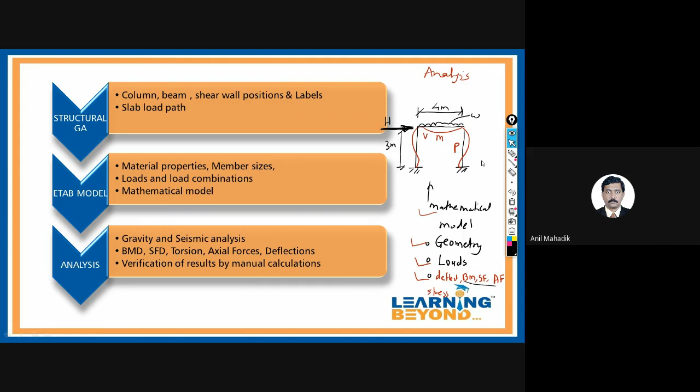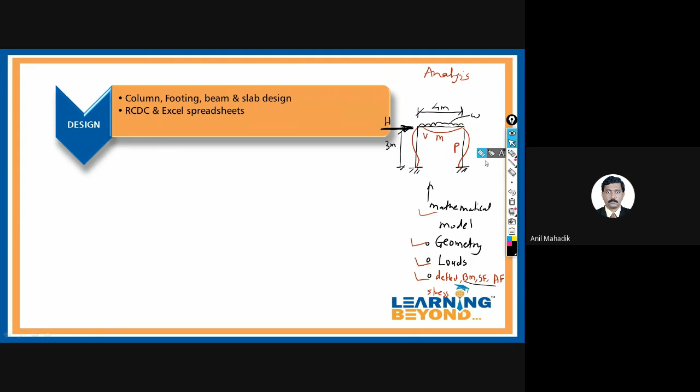And once you get the stresses, what do you do? Design the section. So design the sections generally - design columns, design footings, design slabs, beams. So how are we designing this? Designing on the basis of stresses. Yes.

So we are giving some size to the sections. Size of column, we assume certain size. And on the basis of stress, what do we do? Axial load divided by area.

Yeah, so see, we have got bending moments, axial force, shear force. So bending moments, I will get bending stresses. Axial force, I will get axial stresses. Shear force, I will get shear stresses. So I will calculate actual stresses and compare in the code with permissible stresses.

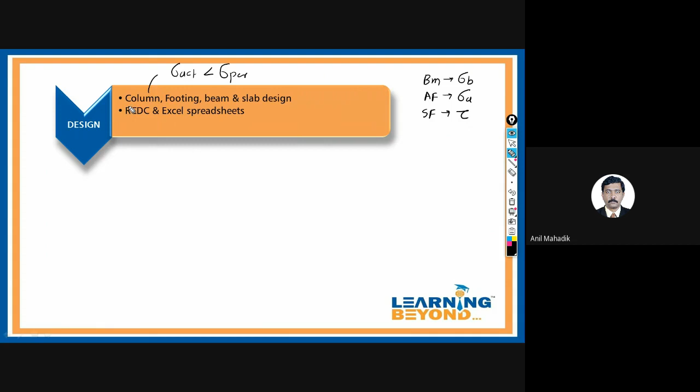I know that for bending, actual stresses, I want sizes of the members because axial stress sigma equals P upon area. But how will you get this area? You need to assume a certain size. Area means area of cross section. So if it is a column, area of cross section is B into D. So you assume some B and D, then calculate actual stress and compare with permissible.

If your stress is more than permissible, let's say sigma actual is more than sigma permissible, what will you do? Increase the area of cross section, that means increase B or D, whatever you want. And then you can decrease this value. So this is the way the design is done.

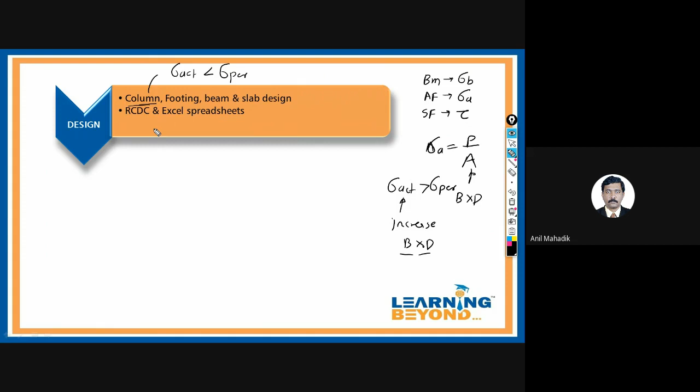Yes, we will learn that in detail. Try to understand the concept holistically. Then we do the design of all members. Designing we can do manually, or you can use Excel programs, or RCDC software. After analysis, we will design the members. Then after the design, definitely we need to prepare the drawings - structural drawings, all detailing and everything. So we will learn that ahead.

Site visits generally are required. It is a very small part, but okay, it comes. So this is the structural engineering workflow, and within this workflow, we are going to work in our training program.